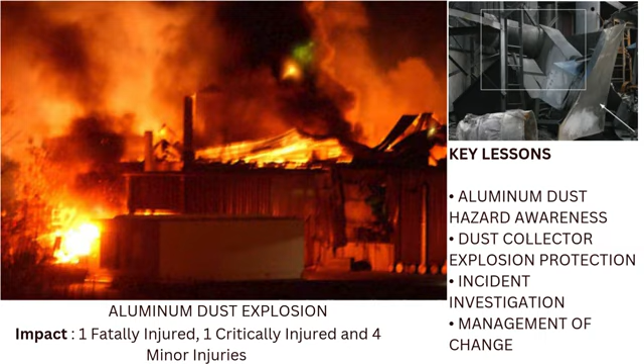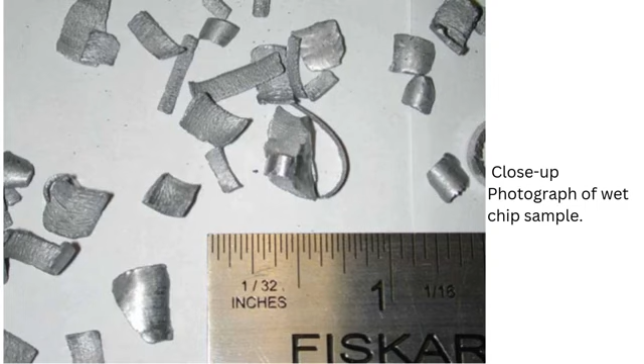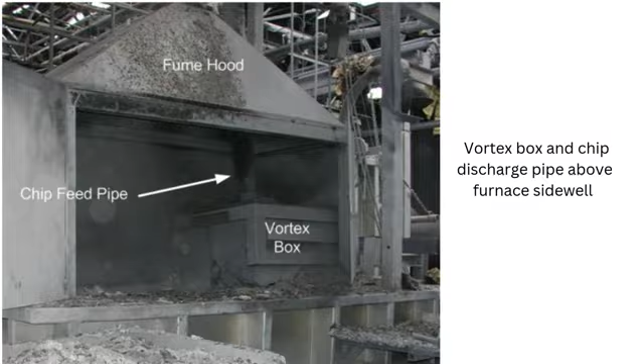On October 29, 2003, an aluminum dust explosion occurred at a facility in Huntington, Indiana, during chip processing. The incident killed one worker, critically injured another, and left four others with minor injuries. The explosion destroyed the dust collection system, damaged nearby equipment, and blew off part of the roof. A fire followed, causing additional damage to the facility and its operations. The event underscored the severe hazards of combustible dust and inadequate safety systems.

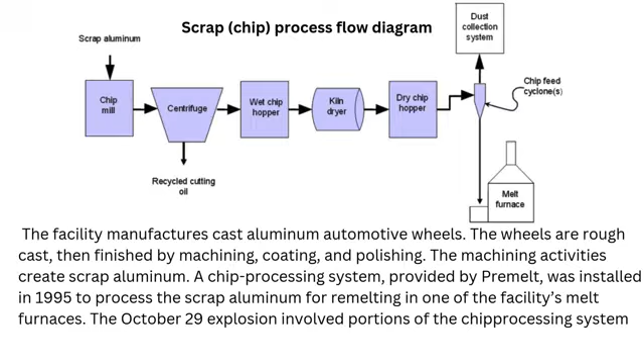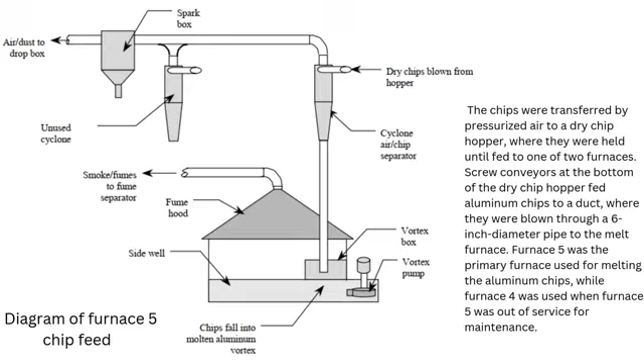What happened? On October 29, 2003, at 2:30 p.m., maintenance personnel noticed a smoldering fire in a fume duct connected to Furnace 5. Following standard practice, they shut down the chip feed and allowed the fire to extinguish on its own. At 8:20 p.m., the chip feed system was restarted. For the next 10 minutes, chips fed steadily into the furnace. However, a mechanic observed chips falling from a spark box in the dust duct, a sign of system blockage.

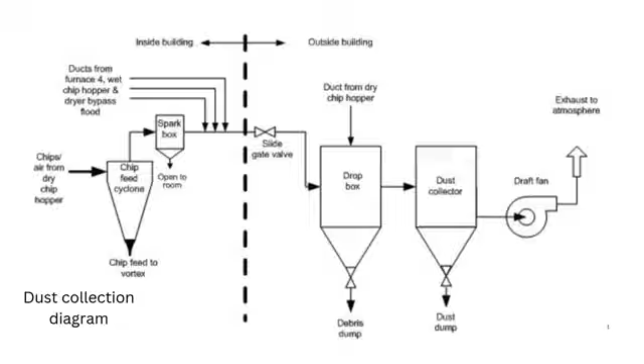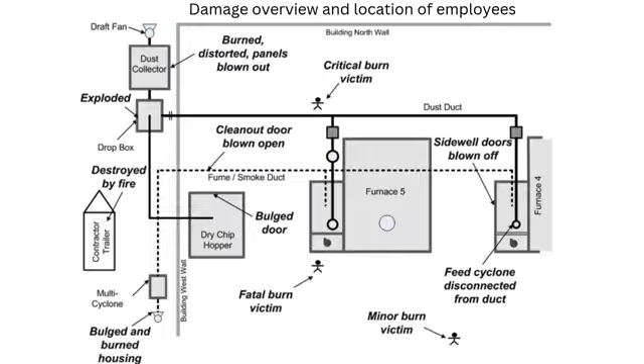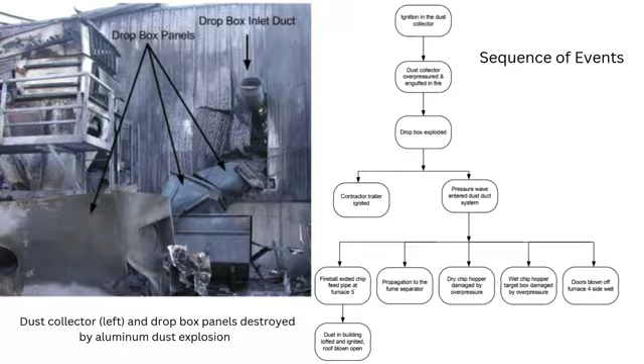At 8:30 p.m., as workers attempted to address the issue, a fireball erupted from Furnace 5's Vortex box. The explosion traveled through the dust collector and ducts, causing the dust collector to rupture and blow fragments against nearby structures. The blast propagated through the facility, lofting and igniting accumulated aluminum dust, resulting in a secondary deflagration that blew open the roof. A fire ensued, igniting nearby plastic pallets and combustible materials, including roofing insulation. The flames were eventually contained by the local fire department using specialized Class D extinguishers.

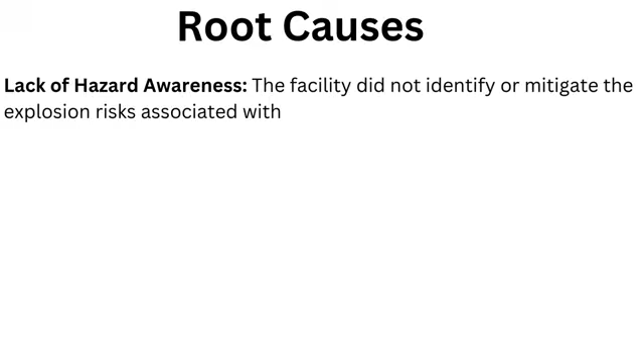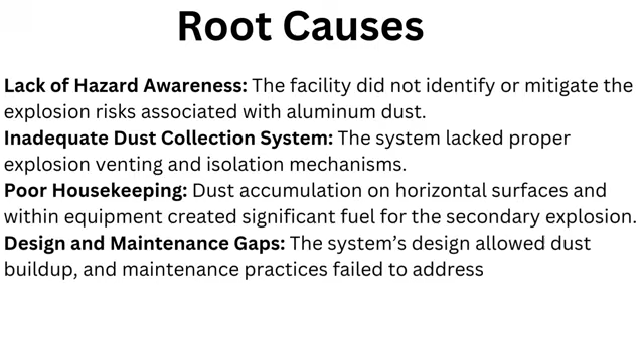What are the root causes? Lack of hazard awareness: the facility did not identify or mitigate the explosion risks associated with aluminum dust. Inadequate dust collection system: the system lacked proper explosion venting and isolation mechanisms. Poor housekeeping: dust accumulation on horizontal surfaces and within equipment created significant fuel for the secondary explosion. Design and maintenance gaps: the system's design allowed dust buildup, and maintenance practices failed to address the hazards of existing fires. Inadequate training: employees lacked training on the hazards of aluminum dust and emergency response protocols.

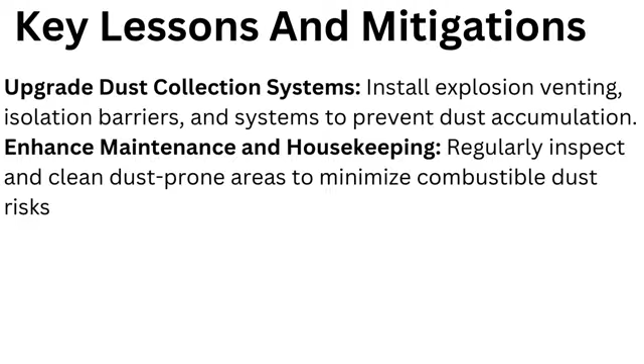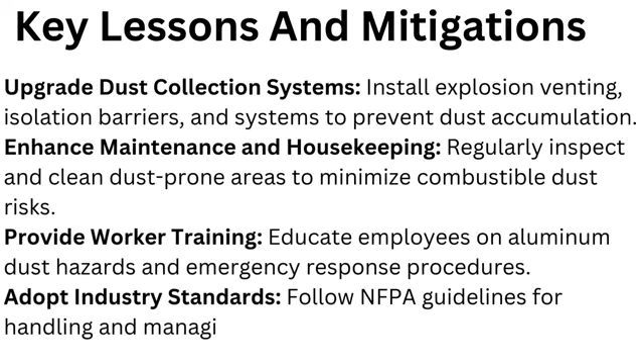Key lessons and mitigations: upgrade dust collection systems. Install explosion venting, isolation barriers, and systems to prevent dust accumulation. Enhance maintenance and housekeeping by regularly inspecting and cleaning dust-prone areas to minimize combustible dust risks. Provide worker training to educate employees on aluminum dust hazards and emergency response procedures. Adopt industry standards and follow NFPA guidelines for handling and managing combustible metal dusts.